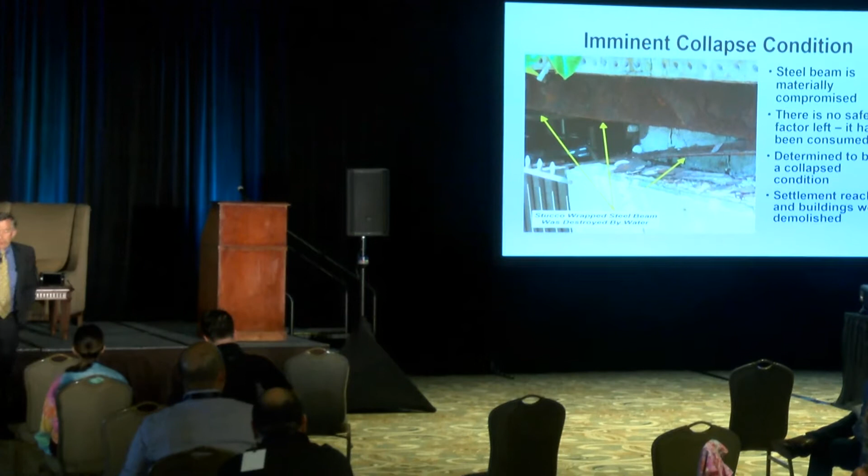And the reason there's a question mark, and we'll show you that pretty soon, but you can see we've got windows blown out, doors blown out, part of the roof blown off, and this is one of 2 hangars at this location. This is in Nashville. That got hit by this tornado. And the reason that I ask about structural damage is you'll see that in the next slide.

Hangar doors were blown in, roof was blown off, these airplanes were knocked all around, and I'm going to hit the right button. You see down here all this gasoline, this avgas back here, all that went into the office areas. So when I hit the site, we had a bunch of pink insulation blowing all over the place, and people were actually running around trying to catch this insulation before it went out onto the runway, because Southwest Air didn't really like insulation in their engines.

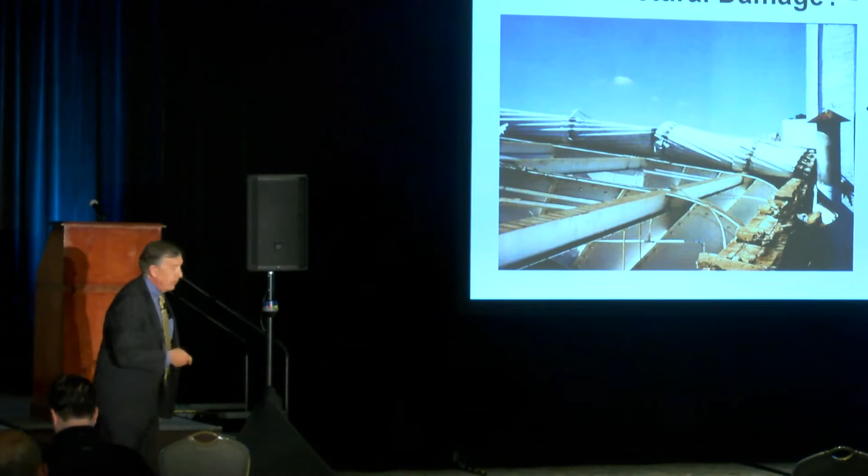Can't blame them. So I told the people, stop, quit chasing this. Get some hoses and hose all this stuff down so it won't blow around. What an idea, it worked fine. Now this is really not a sardine can, even though it kind of looks like it. But the question is, is there structural damage? Well, in this case, no. When you look at this structure, this is an old riveted structure. All these are rivets. This thing was built by the WPA in the 30s.

So this was very important because the adjuster rolls in and says, oh, this is total constructive loss. And for some reason, this one of 18 locations was an ACV, not RCV. All the rest were RCV. So this adjuster was like, total constructive loss, here's $500,000, goodbye. We found out that the broker made a mistake. We got it turned back to RCV. And then we proved that there was no structural damage. And there wasn't. All the skin and stuff blew off, the doors, the windows, everything, but the structure was fine.

And because it was an old building, it was even better than this building here that was brand new. They had turned the keys over to the owner the day before, and then the tornado hit that night. There's a lot less strength, a lot less stability in this building than in the 1930s building. Back to our old buildings again. Because at the time that it was ACV, they would have only gotten $500,000 if it was a total constructive loss, and we ended up getting $5.4 million to rebuild the whole facility. That's why. We didn't want them just to say, go away.

The way we did that, we got a local property appraiser there in Nashville to evaluate the slab, evaluate the structure, provide a value on it, and with him and with me proving there was no damage, that's how it ended up. It came out great. Deep gouges in the pavement. These planes were dragged all around during the storm, and of course the adjuster was like, oh, that's just normal wear and tear, no big deal, just flood coat it, you'll be fine.

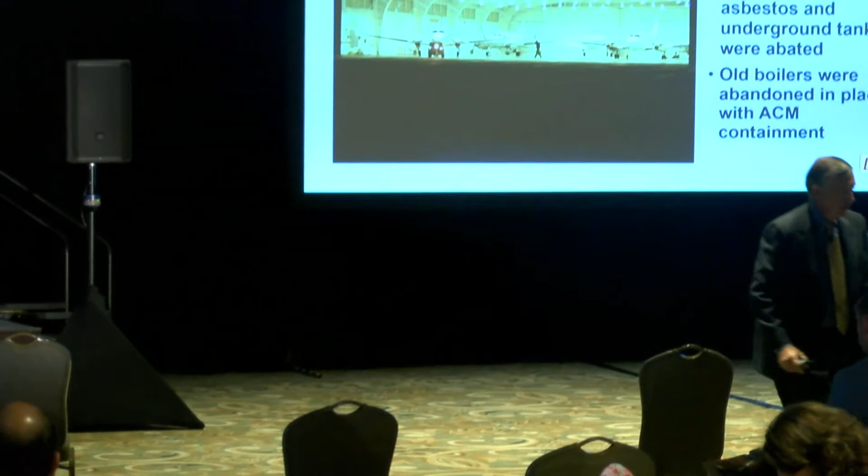Excuse me. I'm sorry? I'm going to have to come closer. I'm sorry.

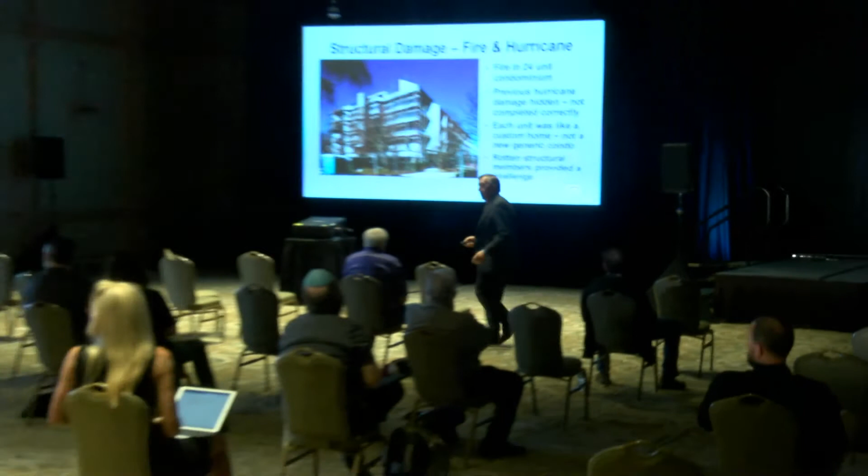Yes, we had some tanks, too, that we found because the electrical system ran through the first hangar, which of course was destroyed, and it fed the second hangar. The best way to get the electrical system back over was underground. And when we went underground, we found some tanks and had to get them out. But it was all covered because it was an expedited reconstruction model.

Now here is a residential deal, fire, 24 units, and there was a lot of previous hurricane damage that wasn't repaired correctly. It was basically hidden behind the sheetrock. It destroyed the top floor completely. Of course, we had fire water damage throughout. And there was a ton of rot, more rot in this building than any other building. And what's weird is the city hydrants didn't work, so they had to use a fireboat to put the fire out, and that's salt water.

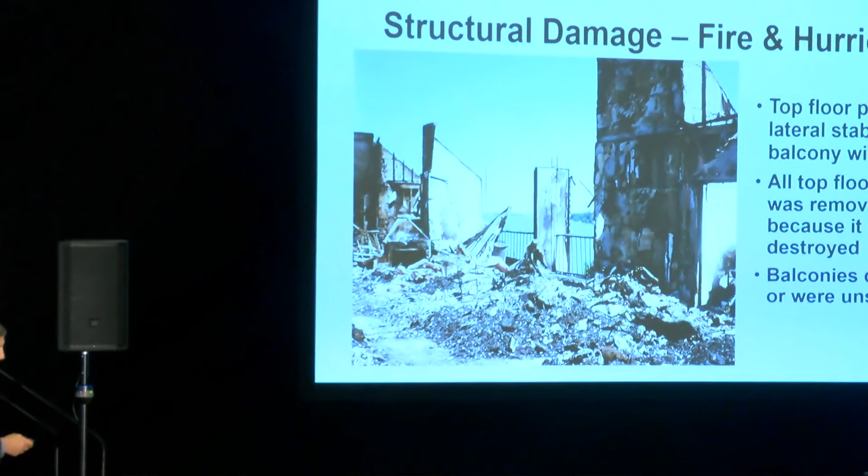And you can imagine the corrosion. Every nail, every truss plate, everything was rusted and corroded with that white powder. It was terrible. So we had to go out there and hand brush everything and paint everything that was going to stay in place with Rust-Oleum. Now, this top floor was pretty important because it provided stability to what are called wing walls. And these wing walls held up these balconies. And you can see the balconies are in the middle.

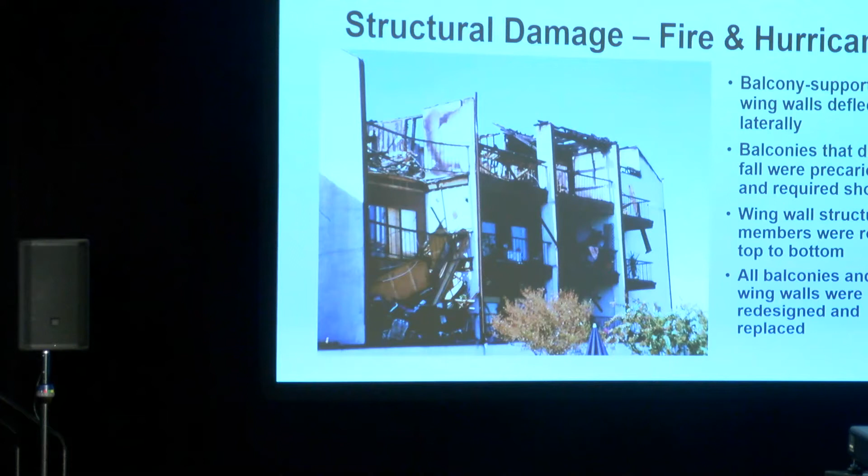And when these wing walls deflect left or right, boom, down come the balconies. Well, as it turns out, the balconies were actually resting on 2x4s that were nailed to these wing walls. So you had 1.5 inches on each side holding up real live concrete balconies, which was crazy. And then the second these walls went a little bit, down came the balconies. Well, we can't rebuild it that way.

I mean, that's a serious problem that has nothing to do with the fire. But in the lawsuit that ensued afterwards, it got paid for because this wouldn't have been exposed, this would not have been an issue, and the loads wouldn't have shifted had the fire not occurred. So part of the engineer analysis was to get them to understand that, and they did.

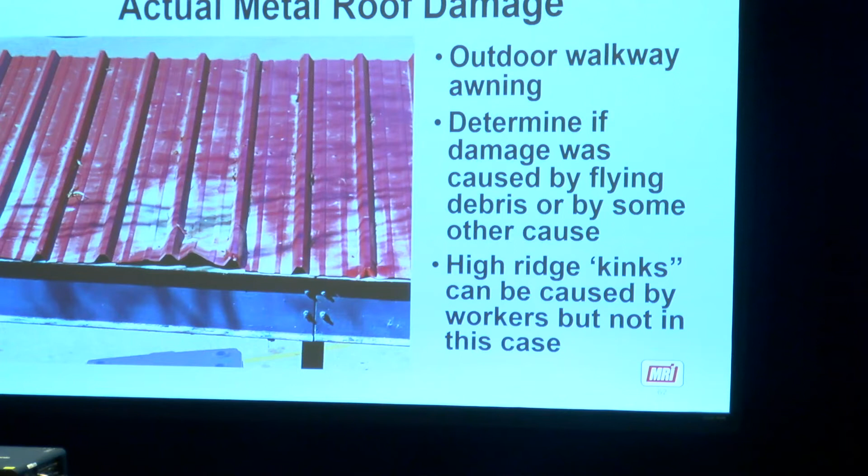So it's flying debris. I could easily say, I know what a kink is. I know how they happen. This is not a kink. This is flying debris. Here's an obvious one. Whoop, went fast. Another one where flying debris, you can see the scratches that opened it up.

And it's an R panel, so you can actually take that panel out or 3 or 4 panels out and repair them or replace them with new panels. Not a problem. But this is damage. It doesn't require an engineer. Now, here's damage that somebody would say, oh, it's no big deal. It's cosmetic, whatever. Well, my position has always been if you have dents, scratches, anything like that, it's damage, period. And that's not what they had before the storm, or in this case, a hurricane.

These are roofs we're working on right now in South Texas with these schools. All these schools, it's amazing. 15 million square feet of schools, and almost all of them are metal roofs. But this is damage. And you look for these things. You got to get on the roof. And you can walk on this roof and think, wow, this is only a few little dents. How can I justify replacing this roof?

But it seems so loose and spongy, and it's just not normal. Go over to the other side of the peak, and oh, this one's solid. And it's not bent, and it's not dented, and it doesn't feel bouncy. Well, then the side that the wind hit is damaged.

Look for leaks. In this case, you notice we got water leaking out of the insulation. Well, when I saw that big bag of insulation, I knew what it was. Poke a hole in it, here comes your water. And it's obvious that this insulation is also wet too. It's falling down. Well, follow the leaks. That's what you have to do, follow the leaks.

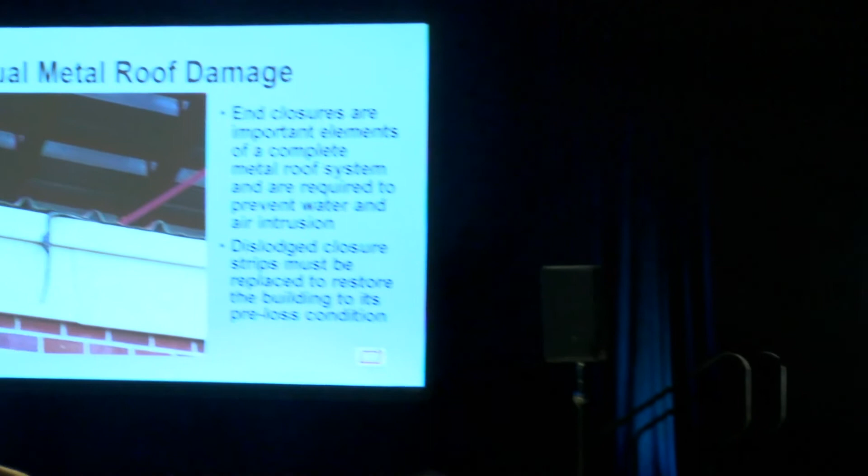End closures. People ignore this like it's nothing. Well, this is, believe it or not, one of the most important elements, because if you have an insulated roof, the insulation is in there right uphill of this closure strip. If you don't have insulation in there, now you have every one of these ribs, what they call elevated or raised ribs, is a conduit for air to blow in. So you've got to go unscrew the bottom row of screws at the very least to get the sheets up to put those back in.

And in some cases, people put tape mastic on those closure strips. I know, I've put in many thousands of feet of these closure strips. They put that plastic mastic tape on there. Then you're in a position of having to clean that old glue off the bottom of the sheet and on the eave girt to try to put a new piece in. And depending upon how old it is, you may not be able to clean that. And it's a gut call, but when I look at it and I see it can't be cleaned, and these are a short run roof, I say just replace the whole roof. That would be our position.